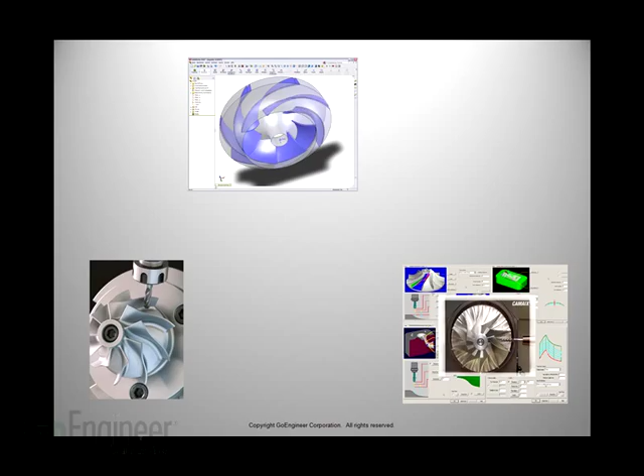So if you look at your screen here, there's a part designed in SolidWorks, great. So how does this get done? How does this turn into an actual physical part? We design the part, then you have to program it for machining, and the way you have to do it is take that part into a third-party CAM software. This isn't CAMWorks, this is an outside CAM software. You have to save it in a format it can read. Maybe it reads SolidWorks files, maybe it doesn't. Maybe you have to save it as an IGES or a Parasolid file. It translates the data, and then you have to save that data. So now you have your SolidWorks file and you have a machining file. Well right there, you've lost some associativity.

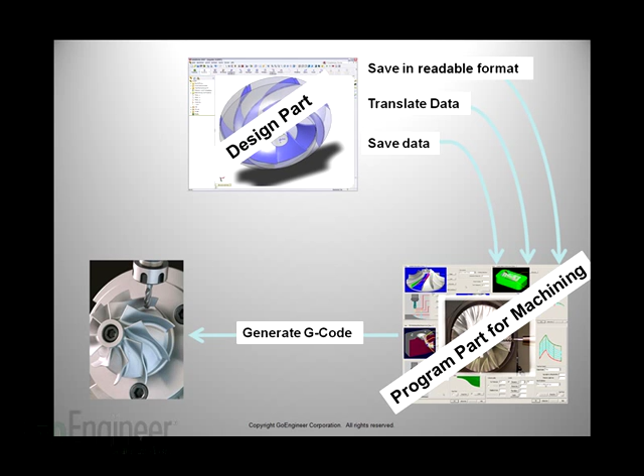But that being said, it goes to your machinist who's using some other software, whatever it may be. He programs the part, generates G-code. Okay, that's fine, it's kind of the way it goes. Now what happens when there's changes? It really depends on where those changes occur in the link. Let's say the machinist had to make the changes - there was an undercut he couldn't cut, or sharp corners he knew were going to be radii. So he calls the engineer and says, hey, I can't do these sharp corners. We can get it EDM'd maybe, but if you want this on the CNC machine, we can't do it.

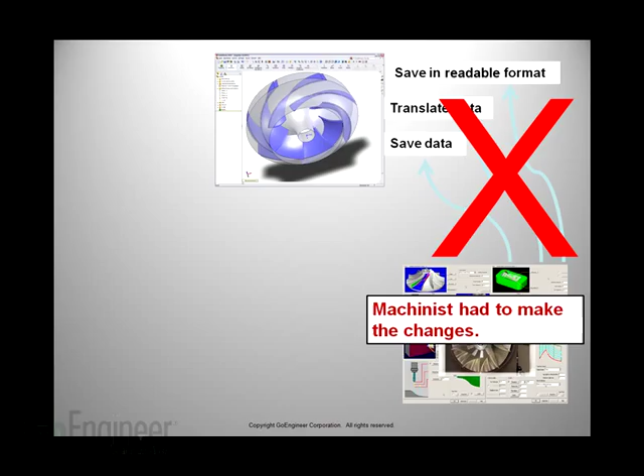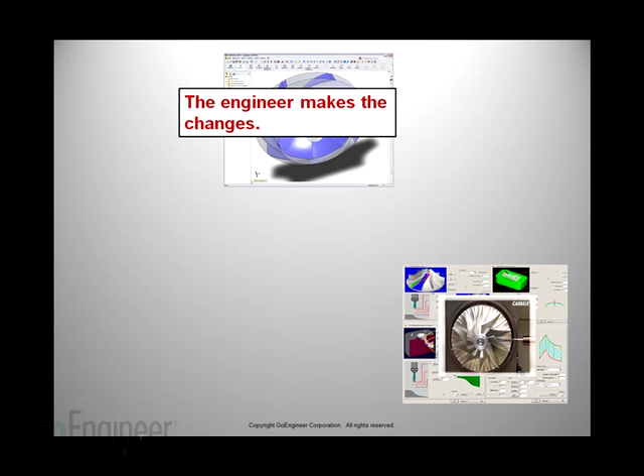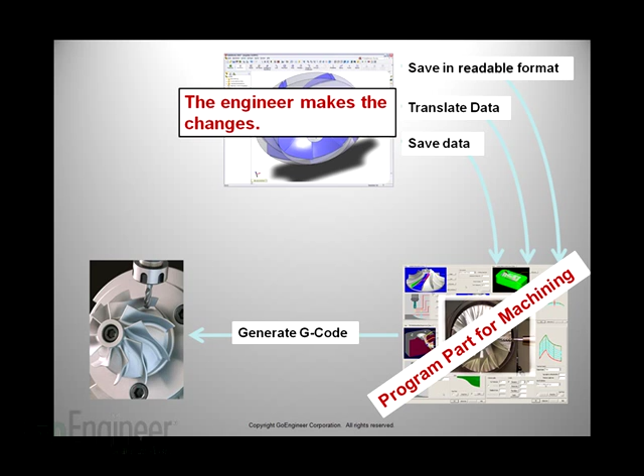So if the machinist had to make the changes, really what you'd want is to take that data he has and bring it back up into your design software. Well realistically you can't do that, because once you save that file out as another file format, it loses all associativity. So let's say the engineer makes the changes on the model, and he calls the machinist and says, hey, there's changes on this part. Well guess what - we have to go through this whole process again. They have to save it out, bring it back into that software-specific file format they can read, and then he has to regenerate the G-code for that part. This is where a lot of time is lost in the manufacturing process.

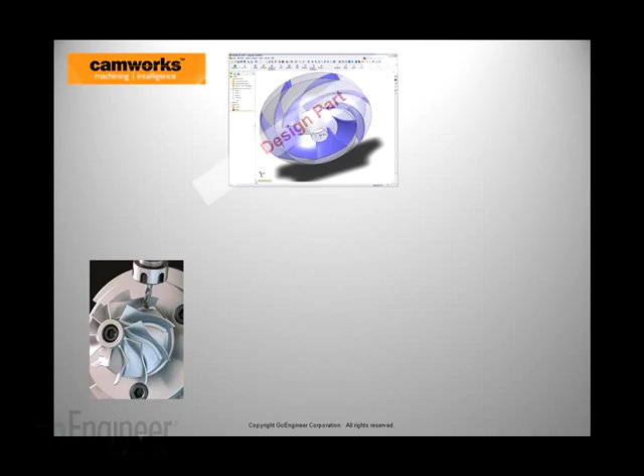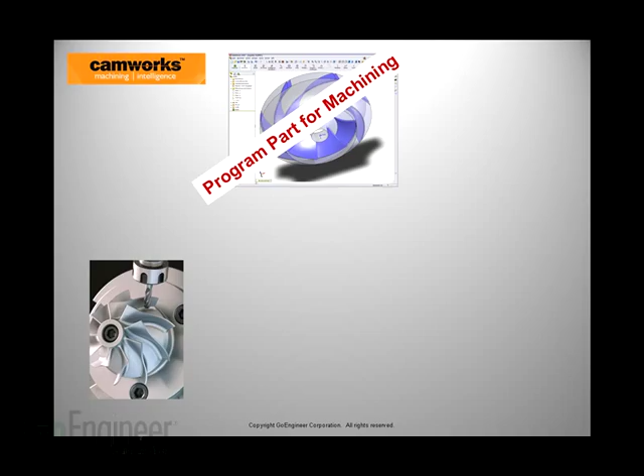So let me show you how it works with SolidWorks and CAMWorks working together. So we have a part here, designed in SolidWorks, fantastic. Well, with CAMWorks, we can go straight from that model in SolidWorks to CNC. The way we do that is we design the part, and we actually program that part for machining. Now it's either the engineer that does it, or the machinist. The machinist will have a seat of SolidWorks with CAMWorks running inside of it, where he can actually take that model and lay toolpath on it. And right from SolidWorks, they can generate G-code right from the SolidWorks window. So what that means is you really are cutting out the middleman.

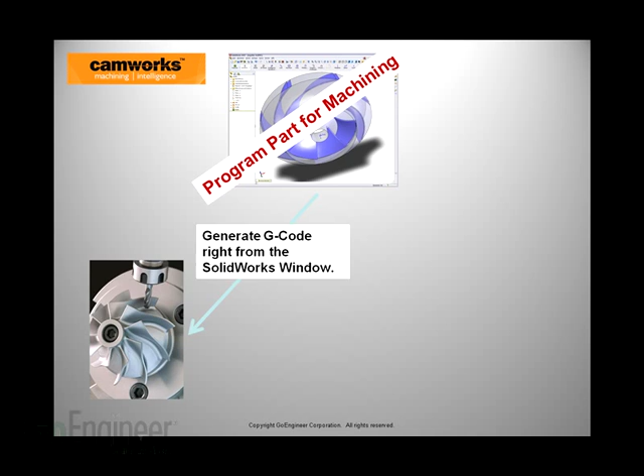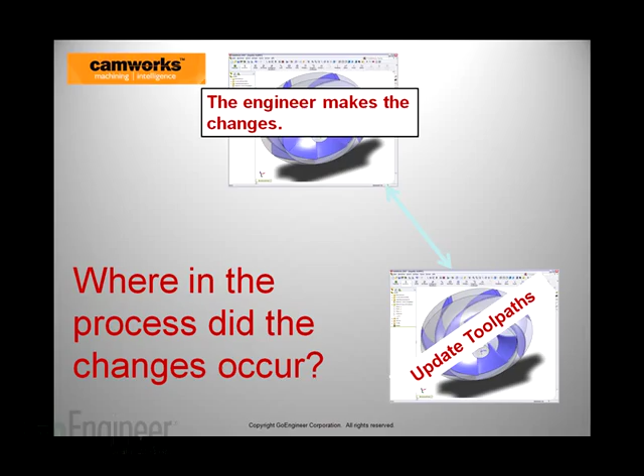So here's the changes. Now there's changes - where do the changes occur? If the engineer makes the changes, those tool paths are automatically updated for that machinist. For that model, if a radius changes, if a size changes, those tool paths are automatically updated. Not only are they updated, but when you save that file and open it up again, all of your existing tool paths that you've already done are already in that model. So if there's a hole that's added, or they put in a pocket somewhere, all the tool paths you've already done are there. All you have to do is add the changes.

So let's say the machinist had to make the changes. Again, being a machinist, I've been there a lot - I look at a part and say, that can't be machined. I can, but there's that saying, good, fast, or cheap, pick two, right? We can do anything as machinists, it's just a matter of time and money. We can send something out to get it water jet or EDM, wire EDM, whatever the case may be.

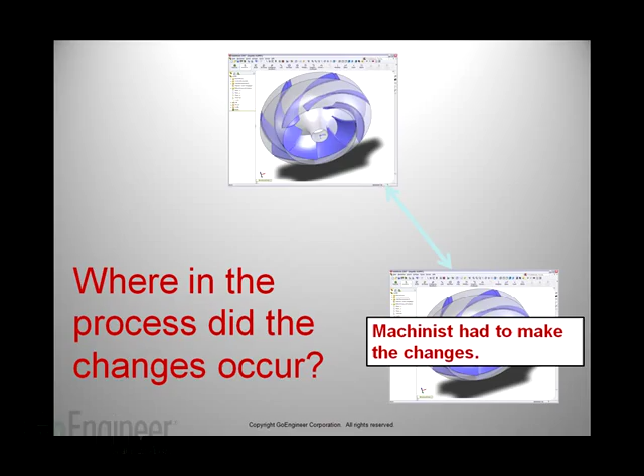But realistically, we know what the engineers are expecting. So we make changes to the model, no big deal. That model is automatically updated for that engineer. So if you call the engineer and say, hey, I need to put radii in these corners, they say okay, go ahead.

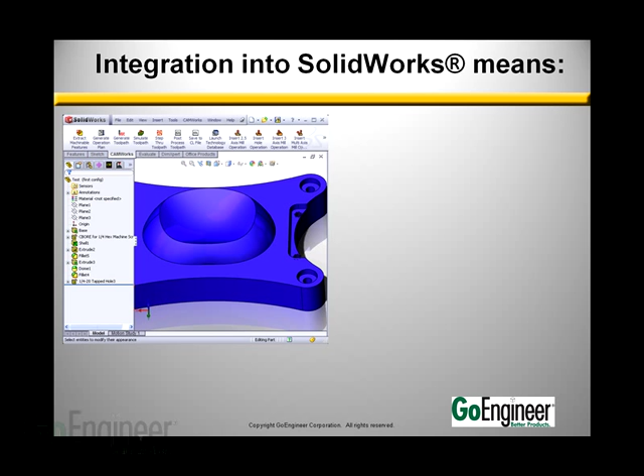As soon as they do that, the next time that engineer pulls up that model, those radii are going to be there. So what does the integration into SolidWorks mean when I say CAMWorks is integrated into SolidWorks? Well, first of all, it means you never have to leave the SolidWorks window to generate a toolpath. Everything is done within SolidWorks. You have the full capability of SolidWorks CAD, and you have the full functionality of a really robust and slick CAM package. CAMWorks uses the same SolidWorks geometry to generate the toolpath.

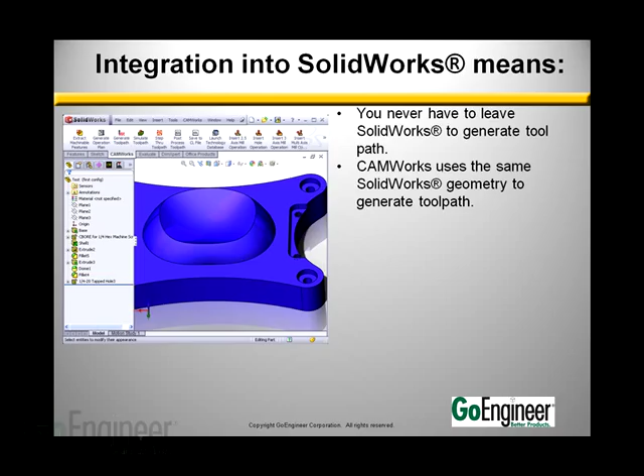This is key. SolidWorks, as you know, takes a lot of time and effort to make it very easy to make complex parts. So when you make these complex parts, you're using that same geometry. There's no translation into a surface model, no dumbing it down for other CAM softwares to read it.

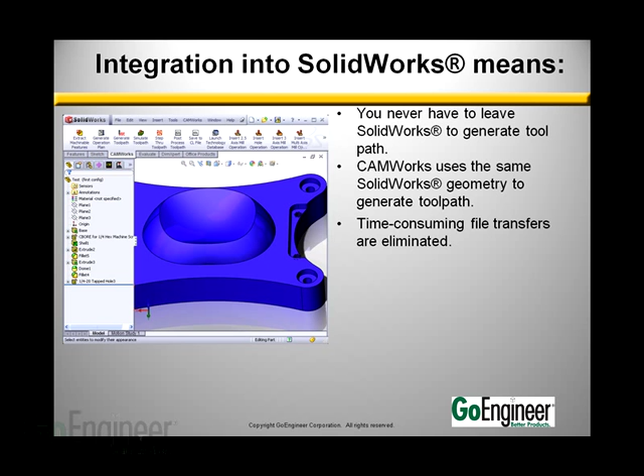Also, the file transfers - and I'm going to get into this a little bit in the demo - the time-consuming file transfers are eliminated. That means if you have to save it out as an IGES file, a Parasolid file, or an STL model, that's totally done, that's gone. You don't have to save these out in any special file format. All of the machining is done on the SolidWorks file.

CAMWorks offers what's called true associative machining. That means when that model updates, because you're machining on that model, all of your toolpaths are going to update too. Now, the way some CAM softwares work is they say, oh, we're associative with SolidWorks. Well, the other CAM softwares that I've used, the way it works is it's not truly associative.

What it does is it makes some pretty good guesses of what the geometry is. And I think any of us, me included, have run into this - it's okay, but really there's a lot of work that needs to be done when a new model comes in. Also, it automatically accommodates changes to the part model. If there's changes to the model, the toolpaths are already going to update.

It really eliminates time-consuming CAM system rework due to design updates. So you have a Rev 1, Rev 2, Rev 3. If those are saved as configurations in SolidWorks, you can automatically just machine those configurations in their own window in that same file. What you don't end up with is a separate CAM file for configuration 1, configuration 2, configuration 3. I'm sure we've all been there - you have 2 or 3 different versions of a part, and each one takes up a whole file with a file name and its unique toolpath. In CAMWorks, you can do those configurations right inside of SolidWorks.

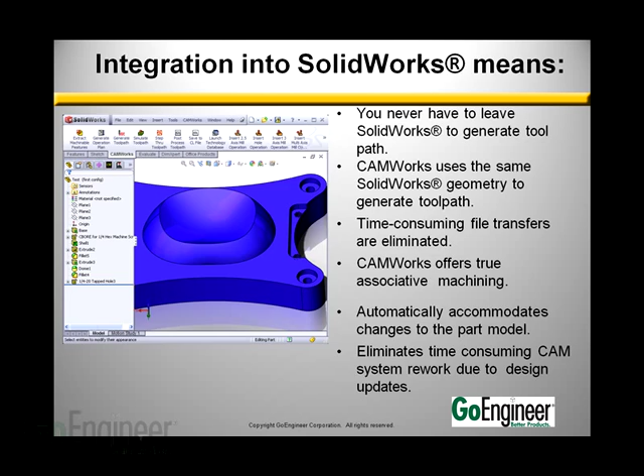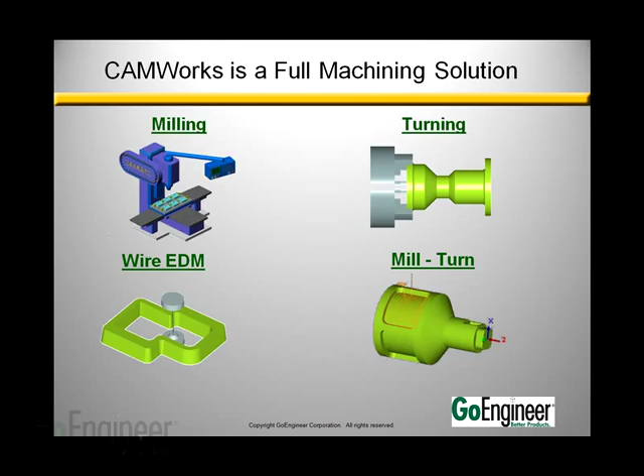I've run into a couple people lately that said, well, CAMWorks is great, but it's just an add-in into SolidWorks. That's absolutely true, it is an add-in, but it's much more than that. It's a fully functional, robust machining solution - milling, turning, wire, mill turn. It has dual spindle on turning, multi-axis, 4 and 5 axis. We do very complex machining inside of CAMWorks. So even though it looks really easy and simple to use, don't think it's just a toy that can't do what you need it to do. CAMWorks is a fully functioning CAM software.

Okay, so now I'm going to get into the CAMWorks demonstration. I've got a couple parts here. What I'm going to show - and I'll do this in a way where hopefully you don't feel frustrated, but hopefully you'll look at this demonstration and say, hey, you know what, I go through that every day - I'm going to bring up a couple examples using different CAM softwares and how you have to transfer files back and forth to get files in and out of those. I have a feeling, if there's engineers and machinists listening and watching, you're going to see a little bit of both sides of this.

You're going to say, oh, I guess I didn't realize what it took to save this model out. And the machinist will say that, where the engineer will say, oh, I understand why he needs this, X sub T or Parasolid file. Now I'm going to try and do this as streamlined as possible, so bear with me.

One thing I'd really like to say is that I'm certified in CAMWorks. I'm actually certified in a couple other CAM softwares, but I'm not an expert at all of them. So when you see me do a couple things in other CAM softwares, understand that I'm doing the best I can with those, but I'm definitely not certified in them. You might recognize some of those CAM softwares and say, hey, there's an easier way to do that. There very well might be, but the idea is there's extra steps involved, and I just want to show you those extra steps.

So let's go ahead and get started. Here I have a part that's out of the samples folder that ships with SolidWorks. It's a standard SolidWorks part made in SolidWorks. I've loaded CAMWorks. You can see here I have my CAMWorks tabs, and in 09, I have this tab up here that says CAMWorks with all my icons.

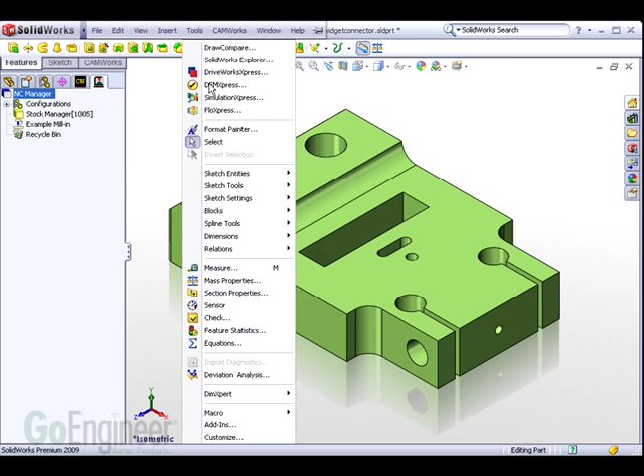Now, as a machinist, I can see that I'm not going to be able to do those sharp corners, and I know what size those holes are. As an engineer, what I can do is run this DFMXpress.

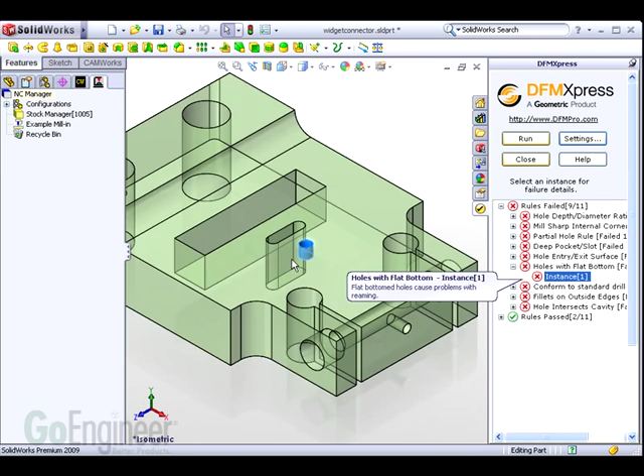What this does is checks the model for machining standards, and it's going to flag a few things. It checks it against some standards, like standard size holes or flat bottom holes, for instance. Here's one that says it's a flat bottom hole. Does that need to be flat? Can I do it with a drill? Things like that. It checks it against a set of rules, and if it breaks the rules, it flags them out.

Now here you can see it saw those square corners. And another thing is standard hole sizes. For instance, if there's a hole that doesn't conform with the standard drill size, you may be able to interpolate it depending on what the hole is. What we need to do is find out if they really need those holes that size or not.

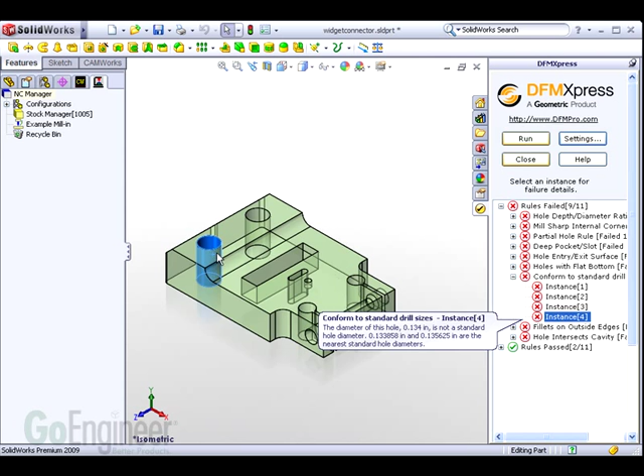Now, if you have SolidWorks 2008 or 2009, you have DFMXpress. It ships with it. You can run this on models as a check before. But let's say they didn't run this, so now we need to machine this.

So we're going to take this model and open it up in a CAM software. Now I'm in a whole other window. This is an outside CAM system. I'm going to go ahead and open this up, and it says this CAM system will open up SolidWorks parts.

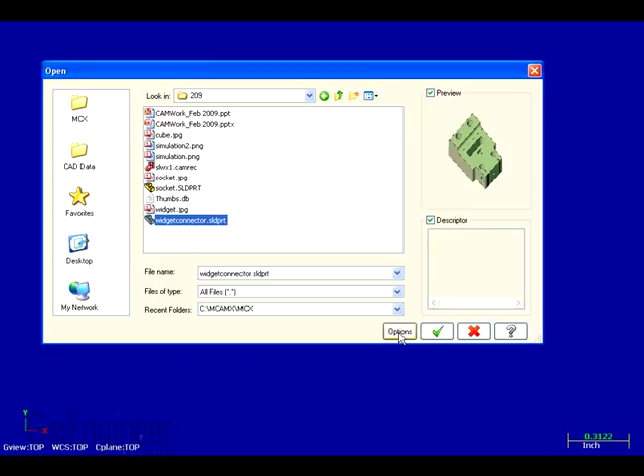But when I do it, I get this warning. The reason this warning comes up is this software, and this is the latest version of this CAM software, is not up to date with the Parasolid kernel that SolidWorks uses. So it says, hey, I can't open up that SolidWorks file. I don't know if a lot of you have experienced this, but this is what I've run into.

So what the engineer needs to do is save it as a Parasolid file in an older version of Parasolids. Right there, that's a pain in the neck. The machinist says, hey, I can't open that file, you have to go back to the engineer. The engineer has to come in here, save as, pick an older version of Parasolids, and then save it out as another model. Now, right there, we've lost associativity to a certain extent with the SolidWorks model.

So I've saved it out, and now I'm going to go ahead and open that Parasolid file. Right now, I've broken the associativity, so any changes that are made are not going to reflect in the other model. All right, let me just go ahead and search for that. There we go right there, so I'm going to open this up.

All right, so it opens up in wireframe mode. Pretty common for CAM softwares. That's fine, I'm going to go ahead and shade it. I'm going to come around. So now, let's say I didn't run that DFM.

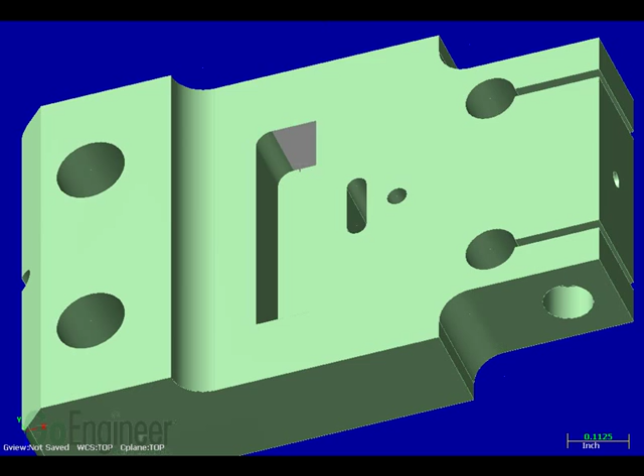I'm a machinist, and I see this for the first time. I see those square corners. I talk to the engineer, and he says, you know what, I need radii in those corners. No problem, I'm going to go through my CAM software and put in those radii.

Admittedly, all CAM softwares outside of CAMWorks have their own CAD system. Now you can see what I have to go through to create these fillets in the corners. So I'm going to go through and put some fillets in here because I know they're going to end up in the model anyway.

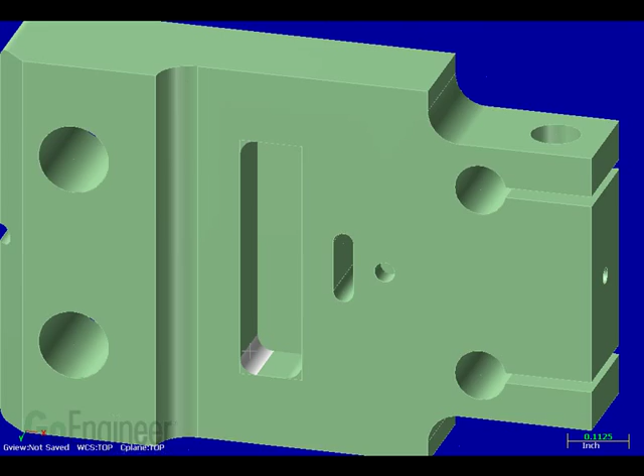I talked to the engineer, he said go ahead and do it. So there we go, we've got all the fillets in there. Meanwhile, while I was doing that, the engineer noticed, wait a minute, this hole size is wrong. I want to make this a standard hole size, so I'm going to make this a 128, which is a number 30 drill. So in parallel, while the machining is being done, the part is changing.

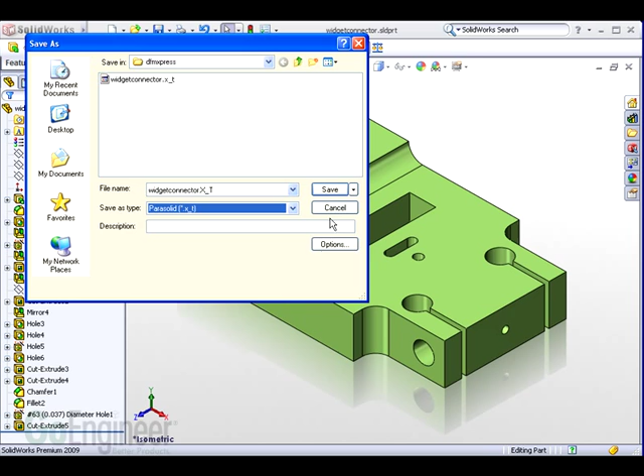So now the engineer makes a frantic call to the machinist and says, hey wait a minute, I've changed those hole sizes. Now he has to go through that same process again: save as a Parasolid, double check that the Parasolid version is correct, that they can open up. We click OK and go. Now, I haven't put toolpath on the part, but if I did, as soon as I open up that Parasolid file, I'd have to do all that stuff over again.

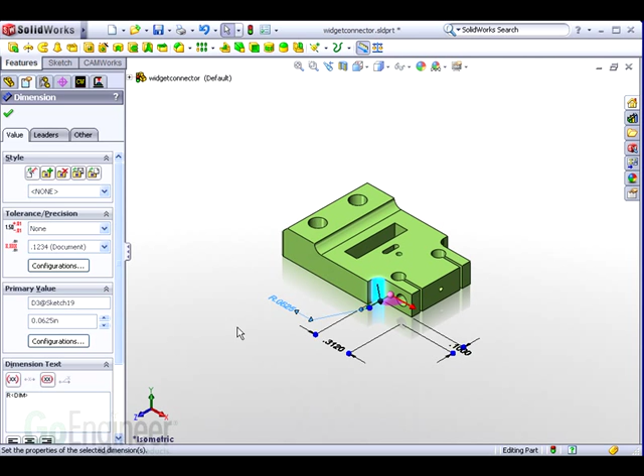Here we can see there's a radii in the corner, there's a fillet in the corner. We changed that dimension. Now let's say, for instance, this is something the engineer forgot to tell you that changed. So when you make the toolpath or bring the new part in and look at it, you may not notice that radii has changed. So right there's a breakdown in communication.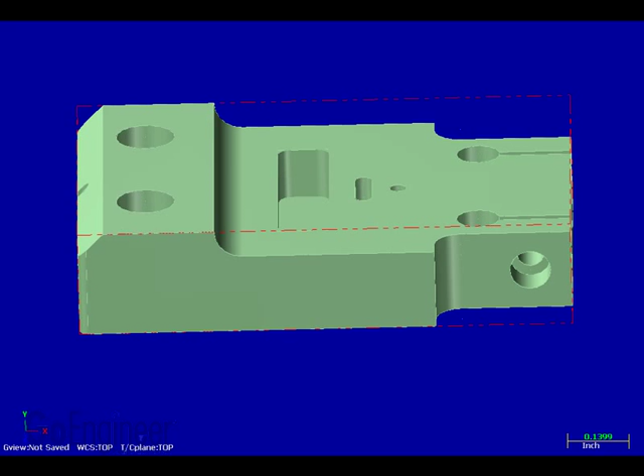This is the middleman, this is going to the third-party software. Let me pull that up really quick. I'm going to open up that file again, and you can see here that, okay, I've got the radii in there, that's great. But you know what, the hole sizes didn't reflect. So now I'm going to have to go ahead and open up that model again and say, okay, something changed in this model, I'm going to go ahead and open it up.

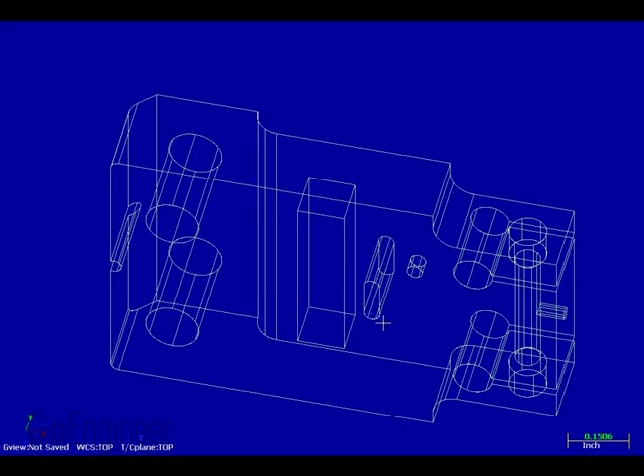Now, because I made those inside fillets inside of this software, you can see that once I open up that X sub T file, that Parasolid file, they're not there. This is an issue. So every single time there's a change, you have to go through and add those fillets again, or go back to the engineer and say hey, you need to put those fillets in, which is more work for the engineer to do.

So let's see how CAMWorks would deal with this. Whether this is the machinist or the engineer, I'm going to go ahead and put these fillets in SolidWorks. You can see how easy it is in SolidWorks. Say okay, there's my fillets. That's great, the hole sizes we're going to say are good.

I just click on the CAMWorks tab, and I'm ready to create toolpath. I'm going to generate a setup for this. I'm going to pick a plane that's normal to my z-axis. I'm going to say okay, what do I want to machine? I'm going to put in a 2.5 axis feature. I'm just going to concentrate on that pocket right now. Say okay, this is how high I need it. Perfect, I'm done, there's my feature.

I generate my tool path. There we go. All right, so there's the pocket. That's as easy as it is in CAMWorks, whether the engineer makes the change or the machinist. So now let's say, oh wait, those fillets need to be a little bit bigger, whatever's fitting in there is going to hit the corners. So we need to go ahead and change those fillets.

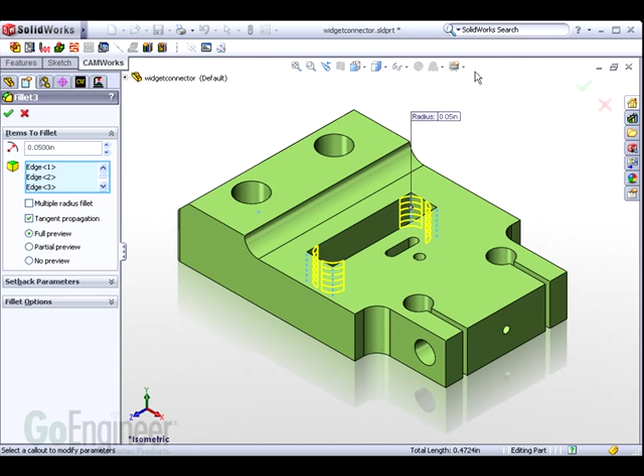So what I'm going to do now is go through and change the fillet, and I'll show you how CAMWorks automatically updates. I'm going to go ahead and change those fillets really quick. It's as easy as just editing the feature. I'm going to go ahead and change the radii there, make it a little bit bigger. Say 50, that's good. All right, model's changed. So what that means is the actual model has changed.

When I click this button, you'll see it says, hey, do you want to update this? I'm going to say yeah, I just want to update the toolpaths that I made. And you can see that the toolpaths automatically update.

So whether the engineer does it or the machinist does it, those updates are automatic. Now, one thing I ran into when doing this demo was changing the part 0, and I forgot how cumbersome it was with other CAM softwares. Let me show you how we do it in CAMWorks. We just double-click on the setup. Let me move this over so we can see it. I can pick a corner where I want my G54, E1, or whatever the case may be.

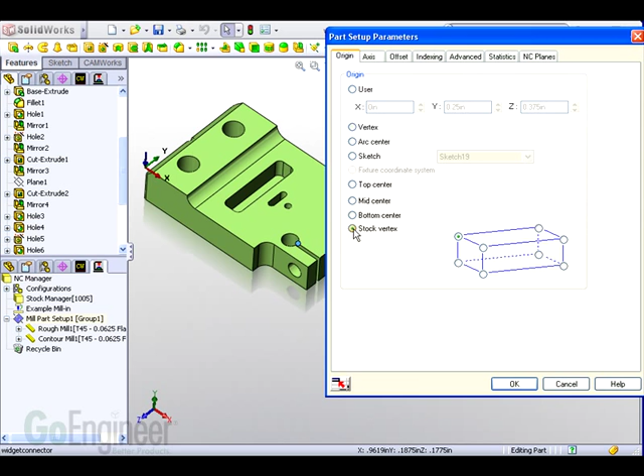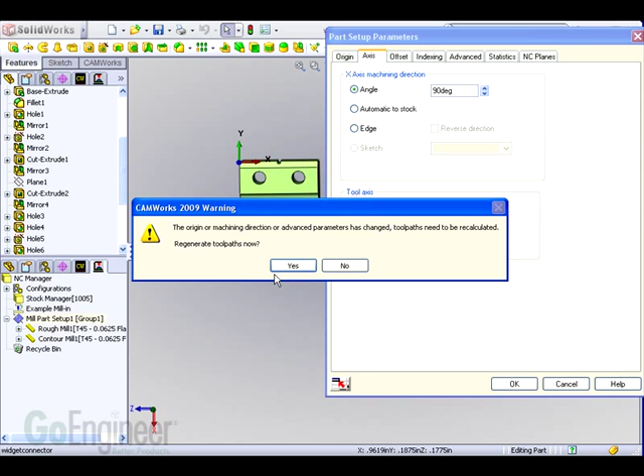I can pick a vertex of where it's going to be. There's no flipping the model, no turning the model around. Some of the software I was in, they said they added a new tab to automatically move the model to part 0. Well, you move it, but then you have to rotate it. It can take a good 15, 20 minutes. Here I can just rotate it around. Here's my new x-axis, here's my new y-axis, here's my 0 point for machining. I click OK, I regenerate my tool paths, and that's as easy as it is.

Now, 6 months from now, or a year from now, or 2 years from now, when I pull this part up, it's totally updated. I don't have to worry about what the newest version is. Are the fillets in there? Are the holes the right sizes? If I pull up a new file, my zero's already set, and it's ready to be machined.

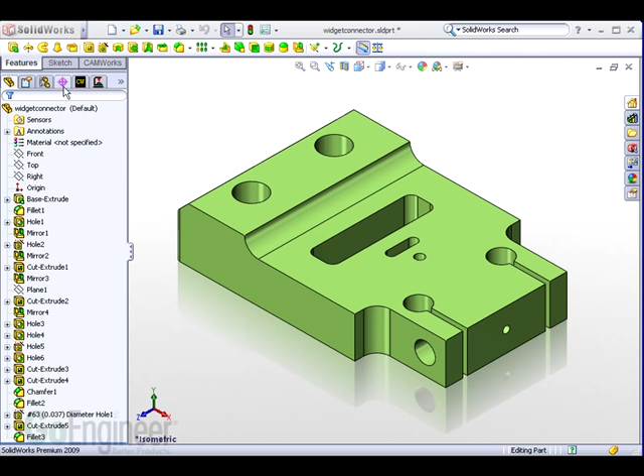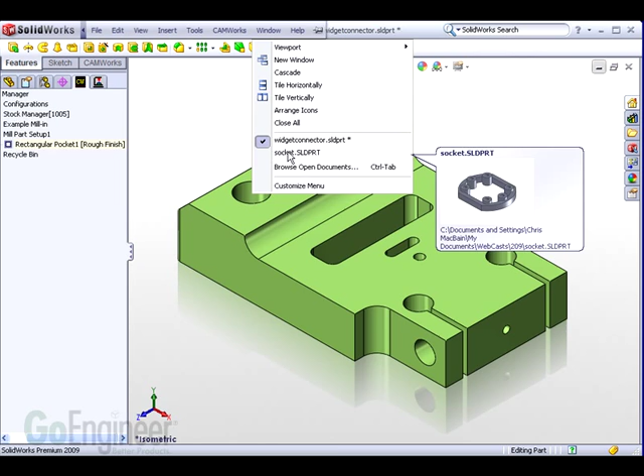Here's another thing I kind of take for granted when I use CAMWorks and SolidWorks: being able to work on 2 files simultaneously in the same window. I don't need 5 windows open to work on a model. I just switch windows, and I can see what's in the background, and it's all within the same window. So I don't end up with 5 or 6 different windows of my CAM software open because I'm in the middle of machining 5 or 6 different parts.

So before we get into translating this into another CAM package, I just want to show you how easy this would be to program inside of SolidWorks using CAMWorks. I'm going to go to CAMWorks and press this button, which is automatic feature recognition. Basically this extracts all the 2.5 axis features it can find - holes, slots, pockets, perimeter features, things like that - and automatically applies toolpaths to them.

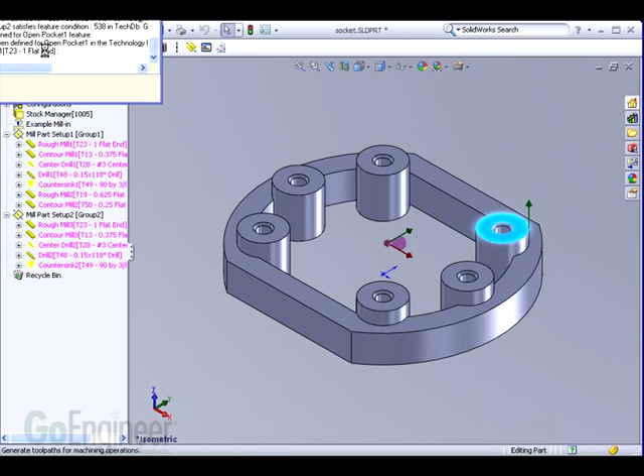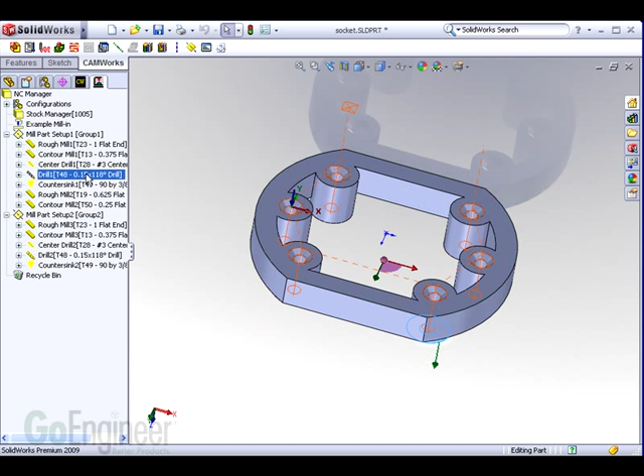Now, you absolutely have the capability to modify these. This isn't what you're locked with. You can modify these - here are all the toolpaths. Now here's something interesting - let me flip this over really quick and show you that it actually made 2 different setups, because on the first setup there's countersinks, but there's also countersinks on the bottom. And mentioning those countersinks, you can see it automatically put in a center drill and countersink for each one of those holes by pressing that button.

And again, you're not locked to this. People think that, oh well, it takes over my computer and takes over control. That's absolutely not true. You can modify these toolpaths, you can delete them, you can rearrange them. You can do whatever you want to them.

Okay, so let's go ahead and open this up in another CAM software. I go ahead and say open file here. And when I open the file, let me find it - there it is. I'm going to get a warning here, and it says, hey, wait a minute, this is an older version. I don't know why it says it's an older version, because I did it in 2009 - it's about the newest one out there. And it says contact support. Well, this means that it's not going to read a native SolidWorks file.

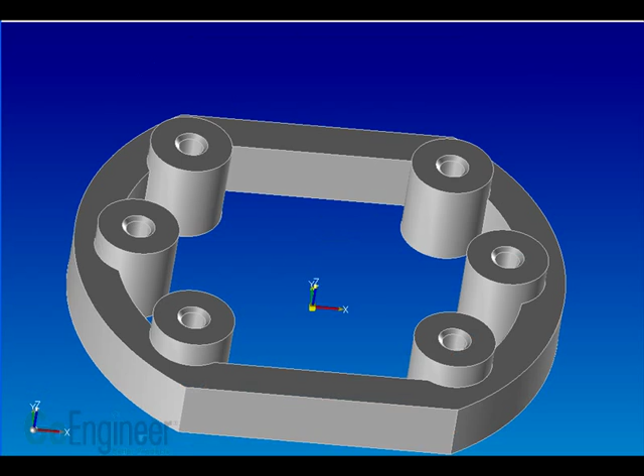I'm going to spare you the agony of going through saving it as X sub T, and just open up that same Parasolid file that I used for the other one. I actually have already saved this one as a Parasolid. So let's go ahead and open this up as a Parasolid. So we can see, we rotate it around. Looks pretty good, right? It's a pretty good translation.

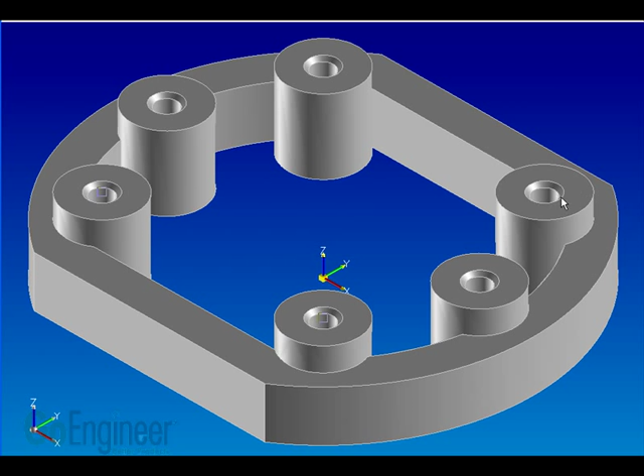It's not too bad. Now, you can see on this part, my G54, my 0, is in the wrong place. So what I need to do is, in this particular software, create a brand new view using 3 points. Let me pick this one, I'll pick this one, and let me pick this last one. And then I need to tell it where my G54 is going to be - it's going to be in that hole.

Fine, easy enough, that's great. Now the problem with that is that's not parametric. Where that exists on the model is not tied to the SolidWorks model.

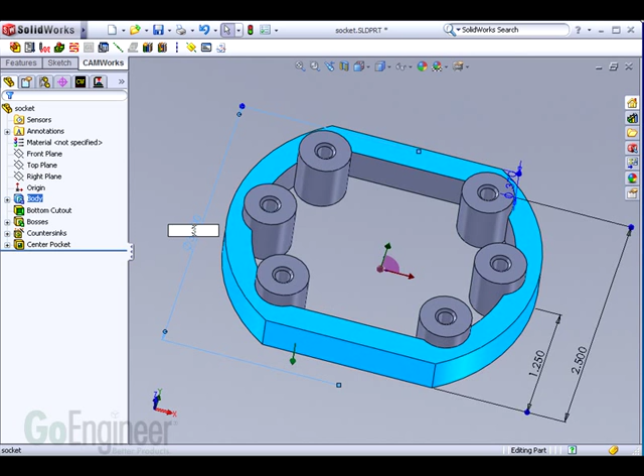So let's go back and change that model really quick. I'm just going to change this outside radius to 4 inches instead of 3. We can see that it looks completely different now.

Basically the same part, same features, just spread out a little bit more. Okay, now I'm going to go ahead and save this back as that X sub T. Again, this is the frustrating part for both engineers and machinists. Hey, I made a modification of the part. You have to remachine it. Okay, you need to send me a file.

Okay, I have to go back. Now what do you need? Oh, I need a parasolid, X sub T, and IGES file, whatever the case may be.

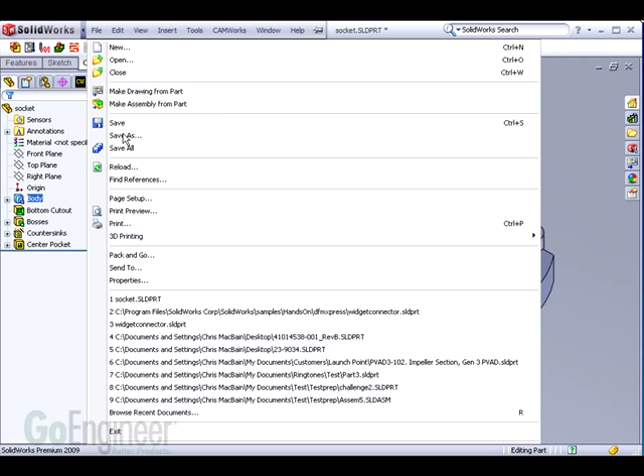So I'm going to go ahead and click on here and say Save As, and I'm going to select my parasolid. Now again, I could do an IGES file, but giving the other CAM system the benefit of the doubt, I'm going to use a parasolid because it's a little bit more associative.

So right here it says the model changed. Great, let's update it. Let's do it. We click Update. You can see, look where my part 0 is. It stayed in the exact same place.

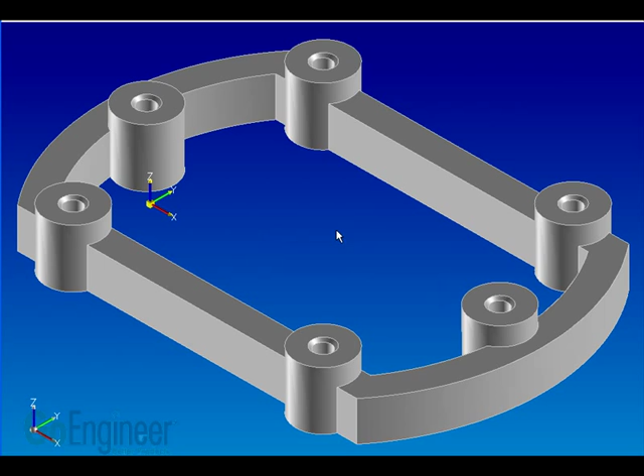So even though the model updated, changes that I made inside of that software that are unique to that software and unique to that machining will not update. And what that means to me as a programmer is now I have to go back and recreate that view, even if it takes a minute or 2 minutes, over the course of a day or a week. That's a lot of time.

Okay, so let's go ahead and let me show you how this works if I did this inside of CAMWorks. So let's open up CAMWorks. I'm going to run automatic feature recognition on this part. We're going to get all our tool paths. Everything's going to be great.

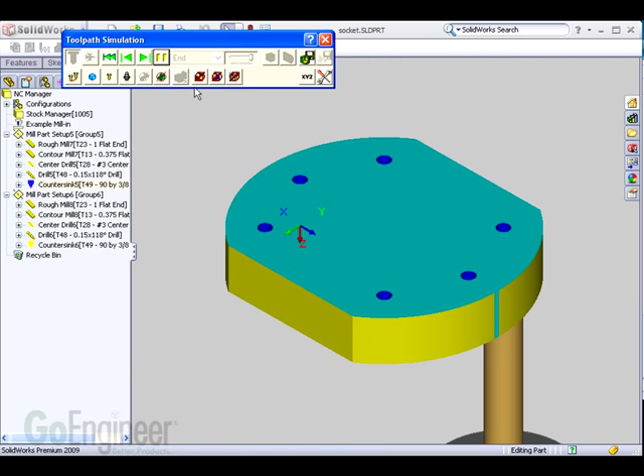Now as I go down these, you'll see that middle pocket isn't machined out. So I think this is a really good opportunity to show the wire capabilities of CAMWorks, at least touch on it and let you see what it can do. When we simulate this part, you'll see everything looks great except that middle pocket's not cut out. So I want to do it on the wire because there are sharp corners.

So what I can do is create another configuration, a CAMWorks configuration. A configuration is the same part, just a little different. So I'm going to make a new configuration and call it wire. This is a configuration inside of CAMWorks, not a SolidWorks configuration. I'm going to rename this wire so I can tell the difference between them and which one's my mill and which one's my wire.

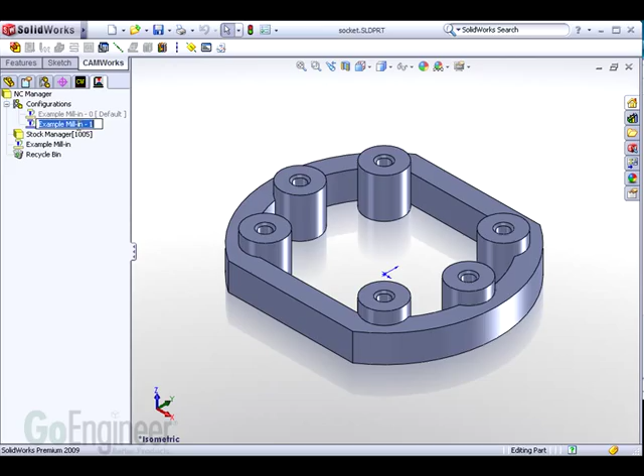Now all of my milling operations are still there, in the other configuration. All right, so to do the wire, I just come in here and say, okay, I don't want to do this on a mill, I want to do this on a wire machine. Let me go ahead and select that.

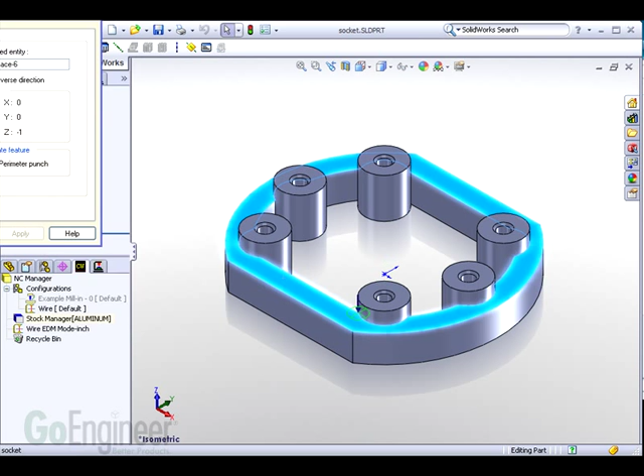Great. So now I need to tell the wire machine where the top surface is, so I'm just going to say this is the part that's pointing up. Fantastic. I could use automatic feature recognition for this, but I'm going to show you how to do it manually, just because it's pretty simple to do.

I'm just going to go ahead and click the path that I want that wire to follow. I'm going to insert that feature and generate my toolpath for it. There we go. And now you can see there's my wire path. It's a little weird to see, but those red squares are where it starts and ends.

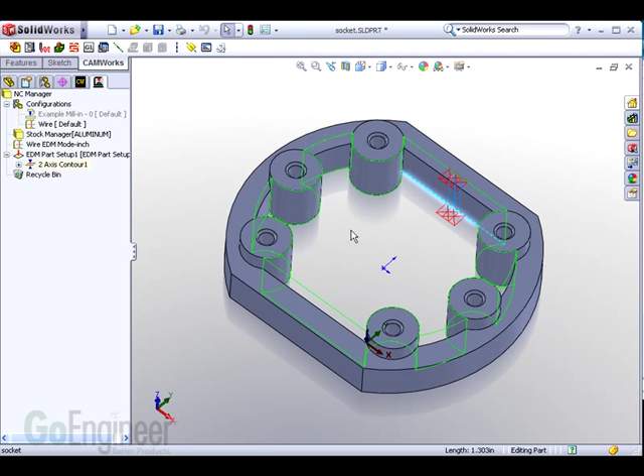Let me show you in simulation really quick. So there it is. It's doing a couple skim passes. If you'd like some more information on wire, please feel free to contact us.

There's a lot more functionality that I don't have time to get into now, but you can see that it's really, really easy to do. Let's go ahead and get rid of that part in the simulation. And then there's the wired pocket.

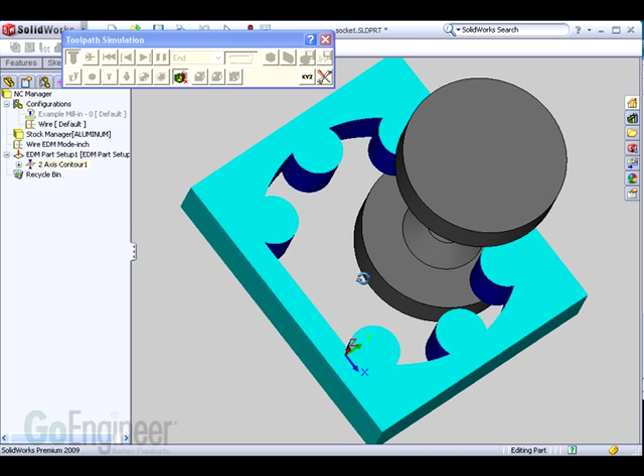Okay, so now going back a little bit, I want to move the zero on this part again. So there's my mill, all my mill stuff's still there, it's in my other configuration. I'm just going to click on my mill. For this setup, let's say I want to change my zero position. Instead of being in the center of that hole, I want it somewhere that makes a little bit more sense.

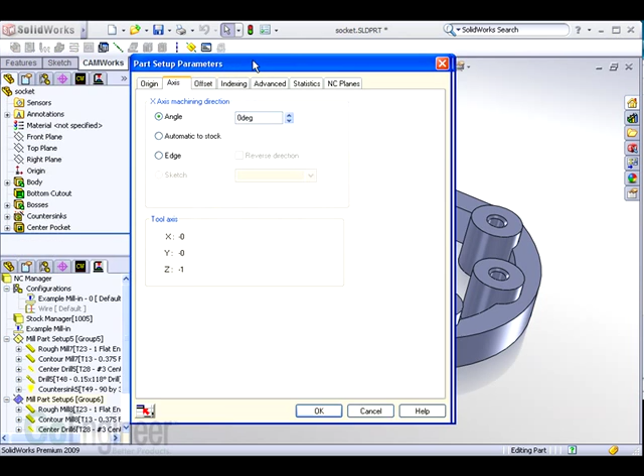Let me move this over so we can all see what's going on here a little bit. So I'm just going to say, you know what, I want it in the corner of my stock. Now the stock you can define to be any size. Out of the box, it uses the default X, Y, and Z's. So there we go, I changed the zero position for my part.

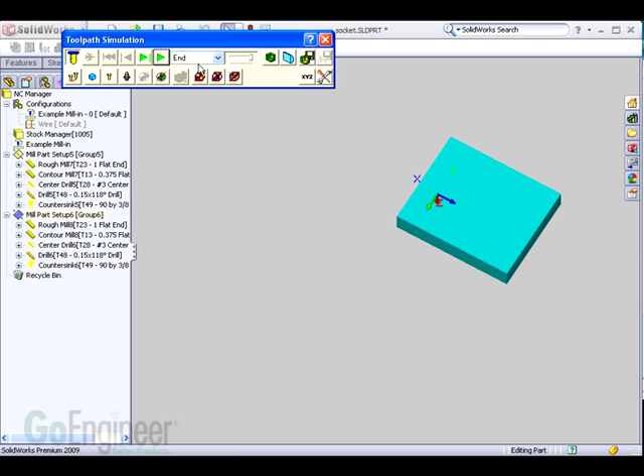Now let's go ahead and I'm going to show you here. I'm going to go ahead and machine this. Now I'm going to save this as an STL model. The reason I'm going to do this is I can save this graphic that you're seeing on your screen, and I can use this to verify my wire model.

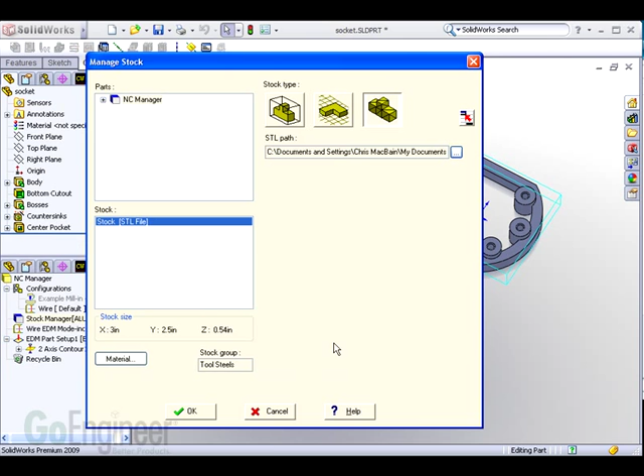So I'm going to double click on my wire. I'm going to change my stock, and instead of a box, I want to use an STL model that I've already created. So I'm going to search for that STL model. There it is, let's click OK on that. So now you're going to see when I simulate this, I'm going to have that model from my milling already there. And it's going to show me where that wire is in relationship to the part that's already machined.

Not only is this key for second ops, turning, wire, things like that, this is also really good if you're machining castings. You can save an STL model in the shape of the casting and use that.

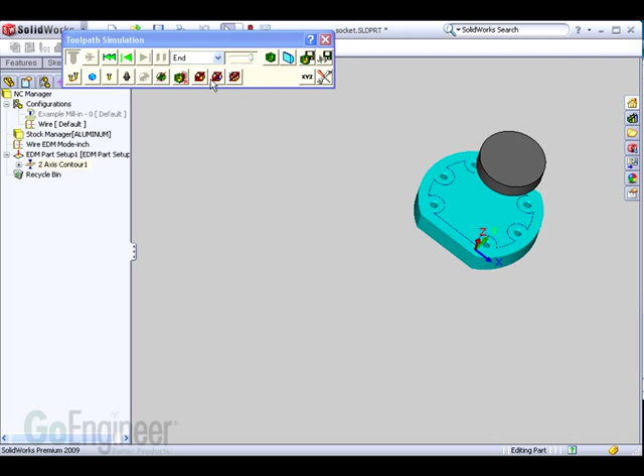Let me clean this up a little bit so we can see what's going on. Let me delete that middle part there. Let me get rid of this tool too. Let me flip this over. So that tool's kind of in the way, I'm just going to hide that. So you can see there's the wired part there. So this is a real good graphic representation of what you're going to end up with at the end of the day. And that's about all the time we have for the demo today.

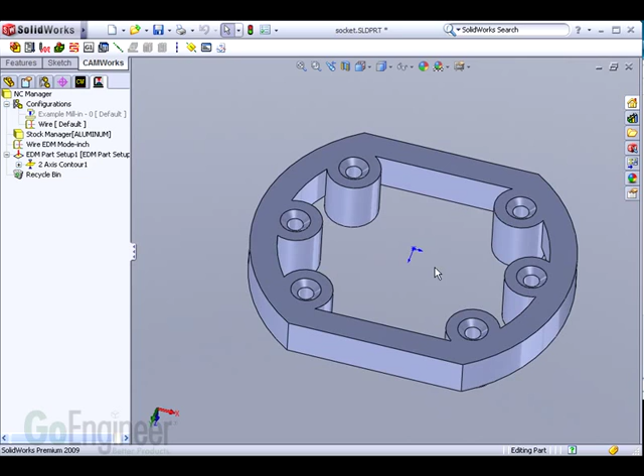So I covered a bit of material today. It's kind of hard to convey the pain to the customer that you guys might be feeling without having you relive it. I didn't want you to get frustrated while watching this, but hopefully I was able to convey to you that there are definitely issues when you use outside CAM software that CAMWorks definitely alleviates. There's a lot of advantages that are kind of hidden. Sure, it's functional, it's fast, it's a very robust, big package, but it also helps the productivity overall, and it really closes that gap between design and manufacturing.